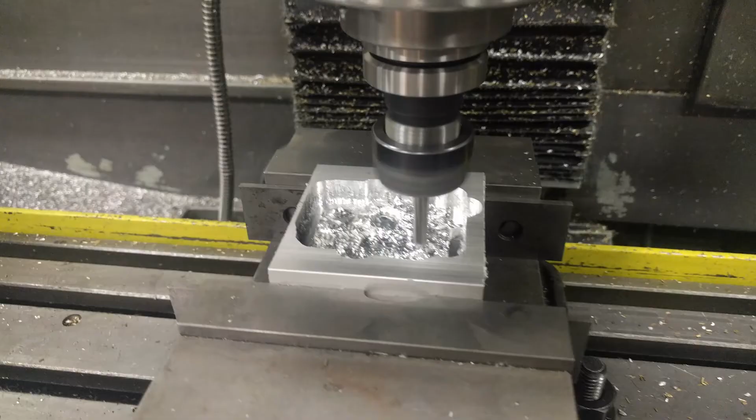A milling machine does have advantages over its 3D printer counterparts. For one, it's much more accurate. It's often made to a fraction of a millimeter accuracy. And on the other hand, you also are taking away things from a solid block of material, which means the end result has none of those layering issues. It's a single solid block of wood or plastic or metal, and it's going to be much harder to break things off. The downside is, of course, the geometry.

When you mill something, you have to be able to have a shape where the machine can take the milling bits and get into the places where it needs to remove material. That means if you have lots of long, narrow, shallow valleys, like say between buildings in a city map, you're going to have real problems with the milling machine having to get a tiny, long, thin bit through that narrow valley without breaking. It's possible, but you have to go slowly, and I mean very slowly.

The tiles I'm sitting in front of would take between 15 and 30 hours each to mill out of a solid piece of metal. That's a long time for a machine that I only have access to in 4-hour blocks. And so practicalities mean that even if a milled result would be much more beautiful, much stronger and harder wearing, I just don't have the equipment or the access to do that with this project right now.

Now, there is a third option, and it comes with a bit of a twist. Additive manufacturing, like 3D printing, can make very decent looking positives. But what you can do is take those positives and use molding and casting to make a mold of the original positive and then cast a new material into that to make a much more solid version.

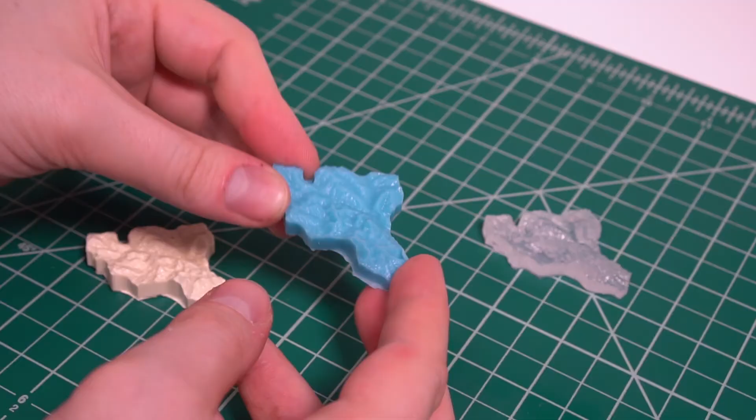In particular, cast materials, because they're casting all at one time rather than being built in layers like a 3D printer, end up being much more solid. And you have a wide range of materials to choose from. You can have clear resins or solid resins or even flexible rubber-based or silicone-based materials.

There is a problem though with casting and molding, and that is the mold making process itself. Molds are very tricky to design. Not only do you need to make a mold so that the resin or plastic can flow into every tiny detail and crevice, but also once it's done that and set, so you can get the mold out again. It can be very easy to make a mold that looks good initially, but you try and pour material into it and set it and it won't pull out properly, or you'll have bubbles all over it, or the tiny details won't be done properly.

And in particular, I've tried to make molds of some of these tiles. I've done some test runs with urethane and silicone molds, and the results aren't terrible, but getting the fine detail required for these models is difficult. I suspect with a vacuum chamber and a pressure chamber, I could probably achieve decent results. But again, this is still an introductory project kind of thing.

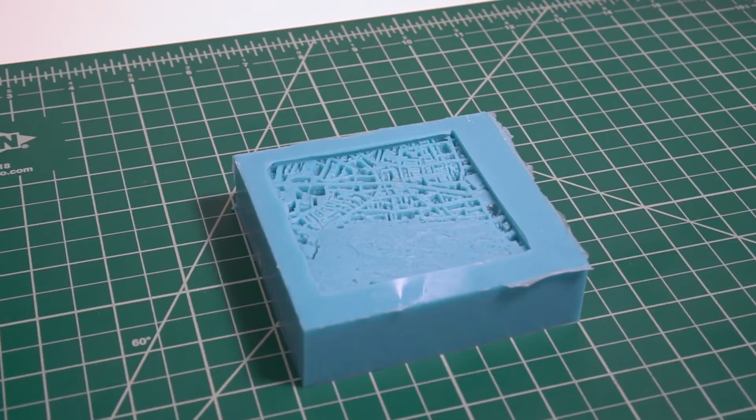But 3D printing in the end has proved the most reliable way for me to make these city tiles with the skills and tools I have access to. There are other projects I've done on the milling machines and casting, and I'll introduce those in later videos. But for now, let's go and look at the 3D printers and let me explain some of the problems and difficulties I've had and some of the ways I've tried to solve them.

So, let's talk about 3D printers and the different types they come in, and in particular, how they deposit materials and make up an object. Now, what I have here are both FDM printers. What that means is they take a big spool of plastic, like this one, and pass it through what's called a hot end to melt the plastic, like this one. Once it's gone through the hot end, the plastic's molten into layers and the object's built up layer by layer to make the final result.

There are other kinds of 3D printers that use things like lasers to fuse material or ultraviolet light to cure resins in place in a liquid bath, but FDM printers are generally the most easily accessible kind of printer and don't need much maintenance, so they're generally a good choice for someone working at home like I am.

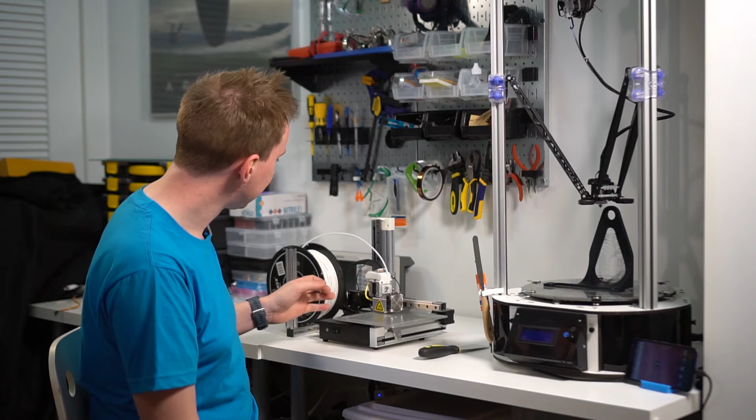Now, within FDM printers, there's a couple of different types of movement and that affects how they print. The most standard type is a Cartesian printer, and that's what I have here. A Cartesian printer moves its print head through X, Y, and Z axes that are perpendicular to each other. It's pretty simple. It's pretty much the first thing you might think of when you think of the challenge, how do I move a print head through 3D space? And that means it's easy to understand and easy to program for.

The second and slightly weirder kind of printer is a delta printer, which is what one of these is. A delta printer still has three axes, X, Y, and Z, but those axes actually stand up parallel to each other. And the combination of movements of these axes with these lever arms mean the printhead moves around in 3D space based on the way the different axes move. Now, you might wonder why you'd have a delta printer when a Cartesian seems much easier and simpler to program for. And the key thing is there's a trade-off.

The delta printer can move a lot faster. The way the delta arms are arranged means that the effector here can move around much more quickly and accurately compared to a Cartesian printer, because you can use all three axes at once. The trade-off is, however, the movement calculations. Deltas have to perform incredibly complex calculations involving calculus and trigonometry to work out where exactly in space the head's going to be as they move the three belts on these different posts up and down. And that means that the accuracy is very difficult to get.

In particular, often delta printers, as you get further away from the center, get less and less accurate. And so you really have a trade-off between speed and accuracy for these two printers. Now, in my case, the Rostock here, which is the Delta printer, was the first 3D printer I owned, and the 3D printer I did my London model on.

The London model, as you may have noticed, is made out of small 7.5 centimetre tiles, and that means they stay pretty much within the safe area on the printer, and they kept pretty accurate. Even then, the tiles are very slightly rhomboid. There's a lot of different parameters to tweak on a printer like this to make it perfectly accurate, and even a few tenths of a degree out on the angle of the different towers relative to each other can cause differences like that. And so it worked all right, but the tiles still have a slight visible edge to them when they're tiled together.

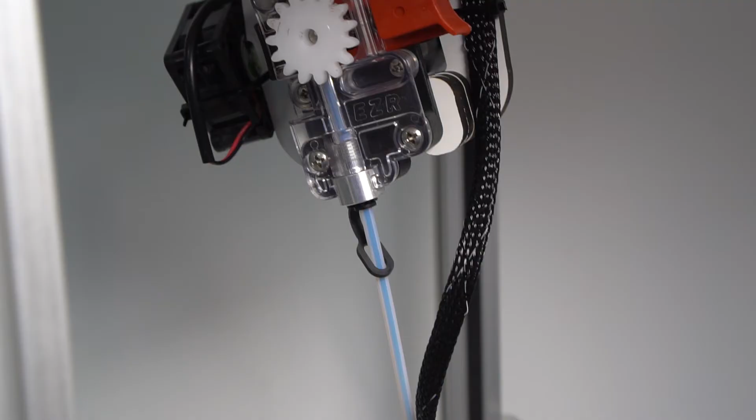When you're doing travels between different parts of an object, you'd usually try and retract the plastic up, try and suck it out of the printhead and stop it oozing. In a direct drive, this is pretty successful. The drive is so close, it just sucks plastic up and it stays in the right place. In a Bowden, however, you've got 40 or so centimeters here of plastic in this tube. And so whenever you try and retract, you're going to find yourself dealing with the elasticity of the plastic as you try and put it up through that tube. What this means is retraction is much, much harder to get perfect on a Bowden-style extruder like this.

Now, faced with this problem, I of course did one thing, and that one thing was buy a new 3D printer. This, the Cetus 3D. The Cetus is a low-cost printer. It's only $300, and it's a little bit bare bones, but it has these lovely linear bearings for each of the axes and has very good reviews about how well it performs. And so I made the plunge and got one.

And I've been very impressed. I got the Cetus, plugged it in, turned it on, sent it one of my files to print and slice, and it just printed it. The result is, as far as I can tell, pretty much perfectly square. There's no stringing at all. The details and the towers look really lovely.

And so the Cetus has become the workhorse for this project. The combination of our Cartesian style of movement combined with the direct drive extruder means it has that square accuracy and the lack of oozing that I'm looking for. There are some drawbacks. I have three main kinds of plastic I 3D print with: PLA, ABS and nylon in increasing order of durability, and the Cetus can only really do PLA.

The lack of a heated bed means that it's very hard to make ABS print well on this machine. The Rostock has a nice heated bed, you can make an enclosure around this and do ABS and nylon very well, but this is just PLA. That said, I like using PLA. It's easy to use, it melts very effectively, and doesn't emit any sort of toxic particulates while it's printing, and so that's what I've chosen to make my 3D models out of.

First off, let's look at Matter Control. Matter Control is the software recommended by the manufacturers of the Rostock, SeeMeCNC, and the one I use for most of my prints on that machine. It's got a reasonably simple interface. Over here on the left is a queue of objects to print. I've picked a small egg cup here as the demonstration model because loading the city tiles into this program makes it slow down a lot, and trying to record and show you this stuff would be problematic.

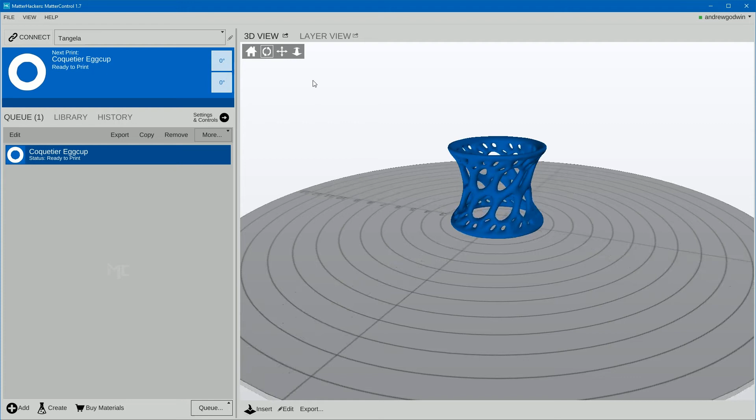So we've got the egg cup, and then we've got two views, this 3D view here, and then the second one, the layer view. The layer view shows you the actual tool path the printhead will take and the layers it's going to make for the model. You can see here the very base of the egg cup is just a couple of layers onto the print bed, but as you go further up, more and more detail starts to emerge and the different layers appear.

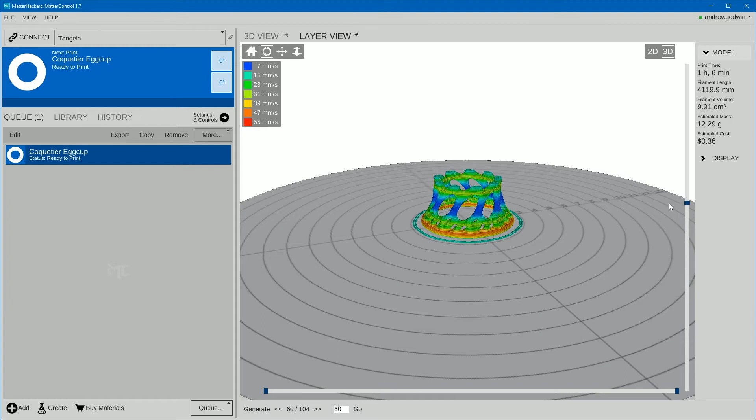The colours are the speed of the printhead. As the printhead has smaller and smaller pieces, it has to slow down to make sure the plastic has time to cool before the next layer. Otherwise, it will just go back over hot melted plastic and just ruin the previous layer. But you can see here the final egg cup and all the layers that would go into making it.

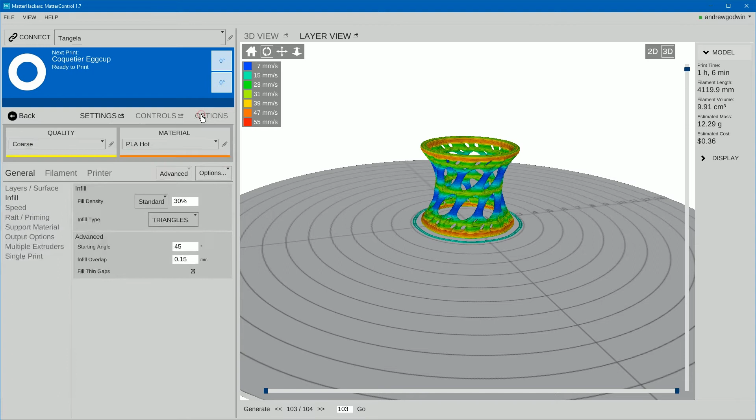Now, of course, you don't just put things into the program straight away. There are options of how you slice it. And the main two options here are two presets. The quality, which generally determines the speed and layer size, and the material, which determines the temperatures the printhead uses to melt the plastic. Here I have coarse and PLA hot selected.

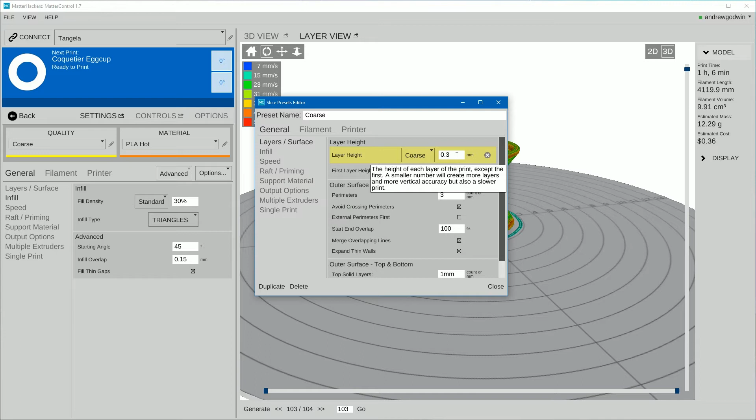The coarse setting sets the layer height to 0.3 millimeters. That makes the layers fatter. So you do fewer layers, but you'll see more obvious ridges on the part because the layers are much more visible. It also turns the speed up above the recommended basic limits for the printer. The delta can go pretty fast, but it will start to lose a little bit of accuracy the faster you go. The PLA hot setting is just PLA settings turned up a little bit in terms of temperature.

You can see here in the filaments, the extruder temperature is 190 and the bed temperature is 60. There's options here for other things such as PLA, ABS, and even flexible rubber-like filaments like NinjaFlex. There's also other options to how it's sliced.

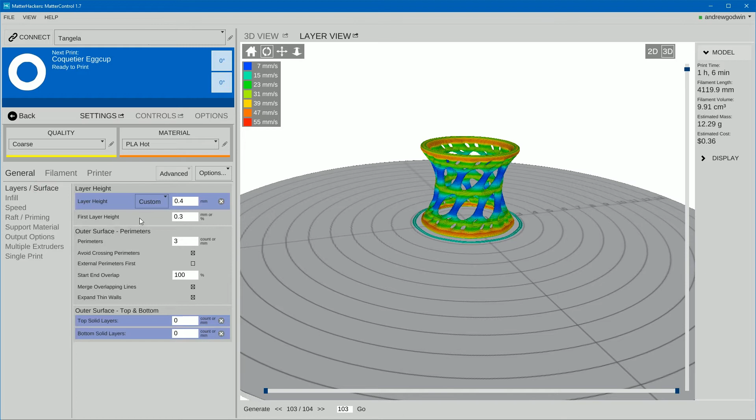We can see here lots of things about, for example, how high the layers should be, how many perimeters we should do. If we look at the two-dimensional view and go to the middle of the egg cup, you can see that there's only 2 or 3 perimeters used anyway. And so it's not going to make much of a difference. We could, if we wanted to, turn this down to 2 or 1 perimeters. Let's put 1 in here and regenerate.

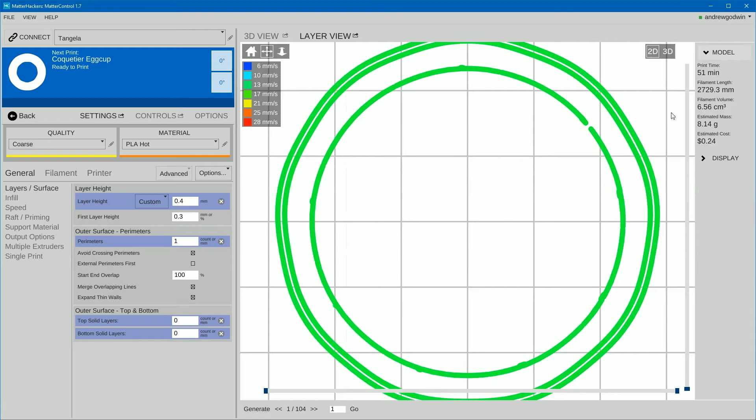Now, we've regenerated with only 1 perimeter, and going through the model, you can see that the inside is much more hollow. There is a little bit of infill, but that is in the empty area. There's some lines and cross-hatching here, which is controlled by our infill setting. We can change the pattern of that kind of stuff as well. But generally, it's a case of going through here and finding out what works exactly for you.

The city tiles in particular require a lot of attention to things like the retraction settings. Here in MatterControl, those are under filament. And you can see here a couple of options around how those are changed. The most important setting here is the length of retraction. This is how much the extruder motor is going to pull that plastic back out of the printhead while it tries to move the printhead through space.

Now, here it's set to 4. This is quite high, but about right for the Rostock. But for a smaller printer like the direct drive on the Cetus, probably more like 1 or 2 millimeters at most. My recommendation for the Rostock is about what you see here. No Z lift, a decent amount of retraction, and going at quite a decent speed.

There's many other options in here to play with as well. Things like the temperatures, the way the fans go for cooling. PLA requires cooling as it's printed to make sure the previous layer is set in time for the next layer. And plenty of other things about how the supports work or having a raft to keep it on the bed. But these are topics much better covered by other people. This is just a general idea of what you end up with when you take a 3D model, like this egg cup, and pass it through a slicer like this to get the resulting toolpaths.

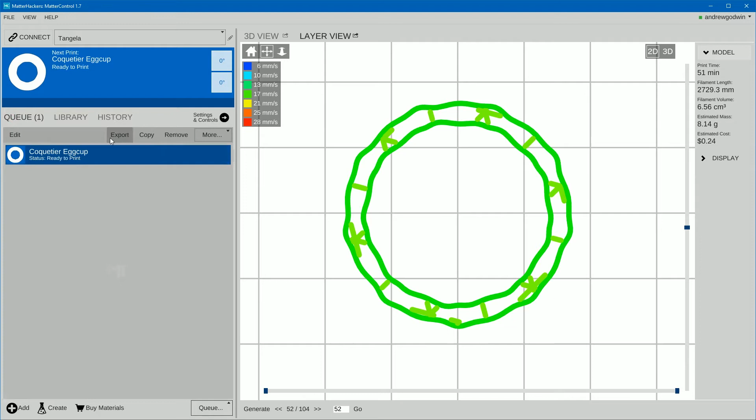The final step is to take these toolpaths and export them as G-code. What we can do here is just select the model, hit export as G-code. And then we can just save these into the right place, and we have a G-code file we can send to the printer. In the case of the Rostock, the printer takes either an SD card with G-code on it, or you can connect something like a Raspberry Pi running OctoPrint to it and send files to that over web interface. Let's go over to the Cetus interface now and see how that looks.

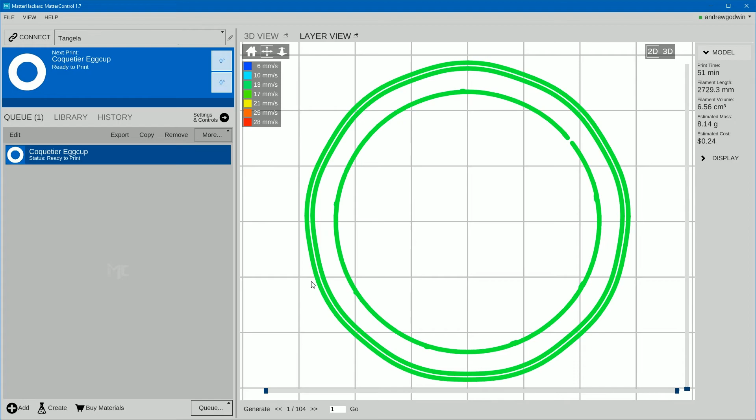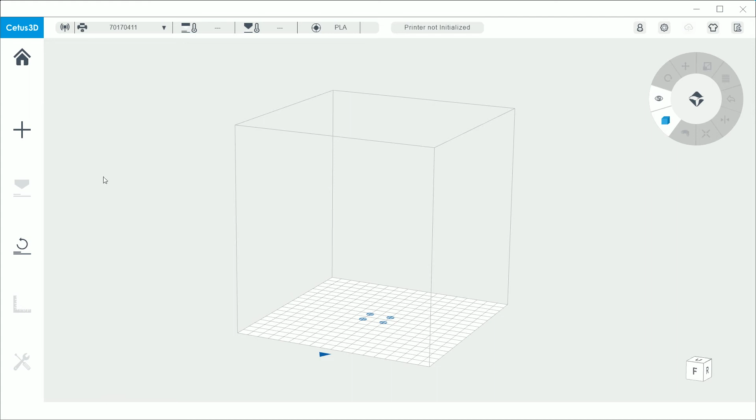So here you can see the Cetus interface. It's an all-in-one program that does printer communication and slicing in one go, but handily it can talk to them over Wi-Fi. So we can go in here, select my printer, and connect to it over Wi-Fi. Once we've done that, we can go to the print screen and do a couple of things. First of all, we can add one of the models to the print area. The box on the screen here shows the entire build volume of the Cetus, that is where it can print. And so if we go in here and just pick one of these models, these are the London tiles in this case, it will load up the model and we can see it here rendered on screen.

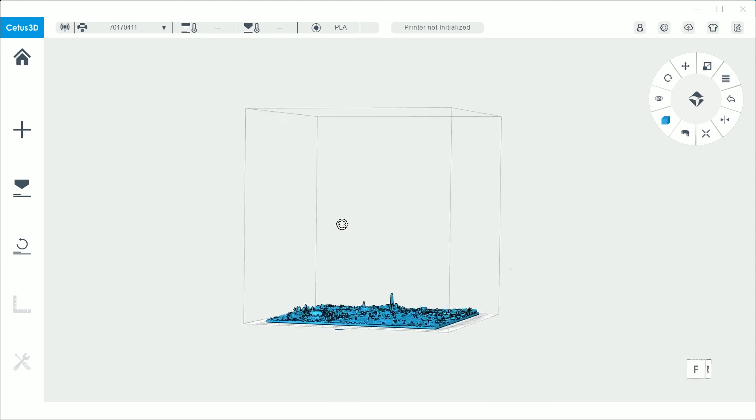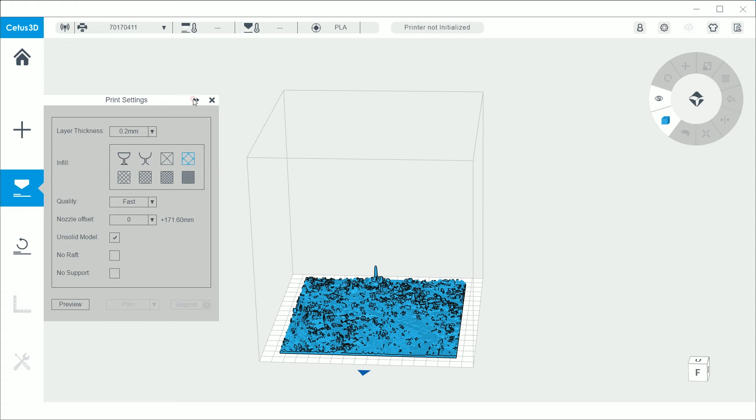Now, notably, the Cetus software is remarkably good at slicing large, complex things like this very quickly. On things like MatterControl or Slic3r, this will take a good 10 minutes to slice properly. Whereas here on the Cetus, we can just hit the print button, choose some of our options. We have, again, layer thickness and the infill patterns and how you want to infill, as well as some more advanced options over here. But you can just pick these options, hit preview in this case, and it will slice in less than a minute, which is a very impressive performance for something this complicated. These models generally have on the order of 30 to 100,000 polygons in them, so it often chokes up some software.

So here you can see it's finished slicing. It's giving me an estimate of both the print time and the amount of material it will take to print. You can also see here that it's made a raft underneath the object.

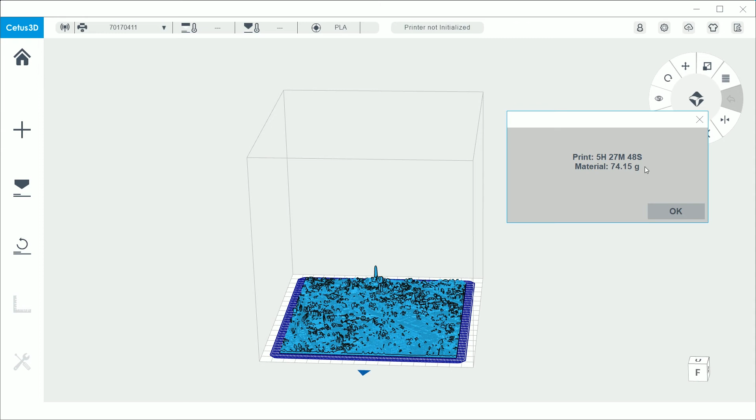This is one small thing about the Cetus. It likes making a raft to keep the print adhered to the print bed. It does waste a bit of plastic. On something this big, it's a good 30 grams of plastic just to make the raft. But I have seen very good results with the raft, keeping the bottom of the tile lovely and clean and making sure it peels off really nicely.

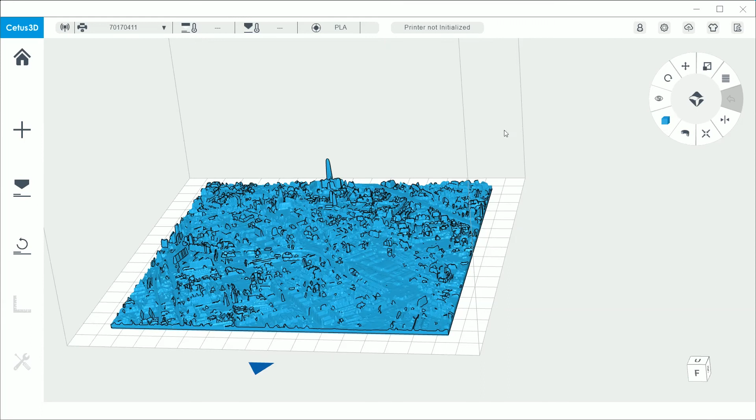Now, unfortunately, I haven't found an easy way to view the layers in the Cetus software, but that's not a problem. It generally does a pretty good job of slicing it anyway. So once you've got the model loaded in, you're happy with the way it looks and the arrangement on the print bed, you just hit this button here to initialize the printer and home it on all 3 axes. And once that's done, you can just hit print, make sure your options are still good, and send it over to the printer to be printed.

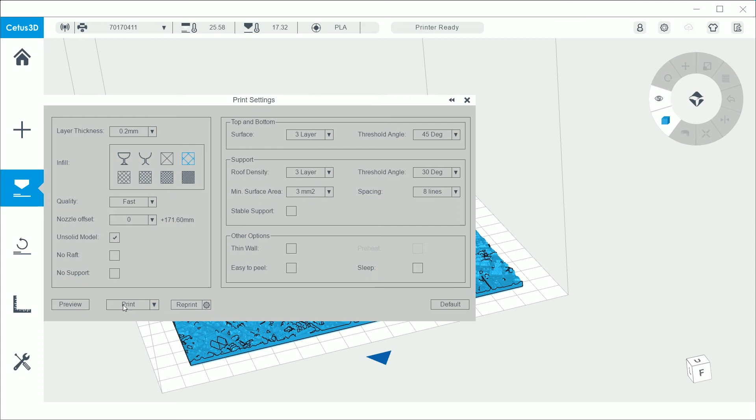The Cetus runs everything by itself, so once it's sent over, you can just close the software and let it run entirely disconnected from a computer, and it will happily print away until it's completed. This is especially useful for these big city tiles where they might take 10 hours to print. I want to make sure they print overnight without leaving a computer on or plugging in a Raspberry Pi to act as the brains of the operation.

So that's the basics of slicing. Once you've got the STLs like you saw in the last piece, it's really not too hard to put them into the software of choice and make them come through. You might have to fiddle with some options to make sure they print perfectly, things like the infill patterns or retraction, but I recommend printing small test pieces, say a 1/8 size piece of tiles like this, and making sure they turn out well before you start on the big tiles and the long, multiple hour prints.

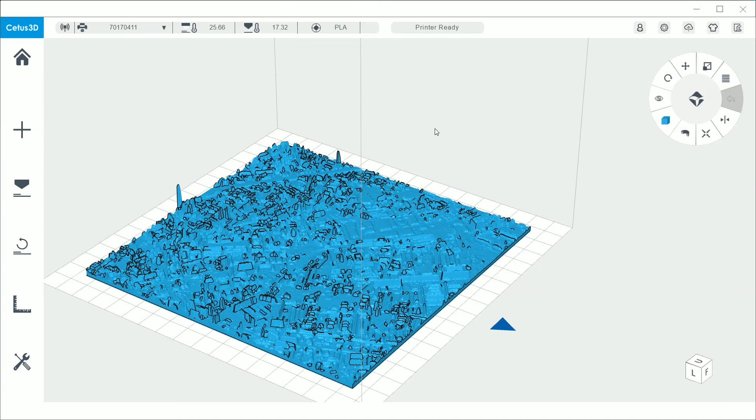Well, that covers slicing the STL files into G-code and sending them to the printer. Now, there's one thing left to do, and that's assemble them into one big piece of art. So let's go back to the table and start on that process. The final part of the process is to take the printed tiles, finish them off, and then mount them onto a backing board. Finishing them is pretty simple.

I just need to make sure that the edges of the tiles are perfectly smooth so that when they join together, the edge between them is almost invisible. For this, I just use a piece of sandpaper like this, glued to a nice flat block of wood to sand it down. PLA is very easily sandable. Once that's done, I need to mount them onto a backing board.

Now, there's a couple of options of what to mount to, plastic or wood. I've gone in this case with foam core. Foam core is light and inexpensive and easy to cut with scissors or knives, and so it's a good choice for this kind of project. What I'll be using to mount to the backing board is hot glue.

Hot glue is also nice because you get a little bit of working time as the glue sets to really get the tiles in just the right place and make sure they're perfectly flush with each other. And if I screw it up, I always have the choice of ripping them off the backing board. The glue is not that sticky. It'll probably destroy the foam core, but it's cheap enough I can get a new piece. So let's get to it.

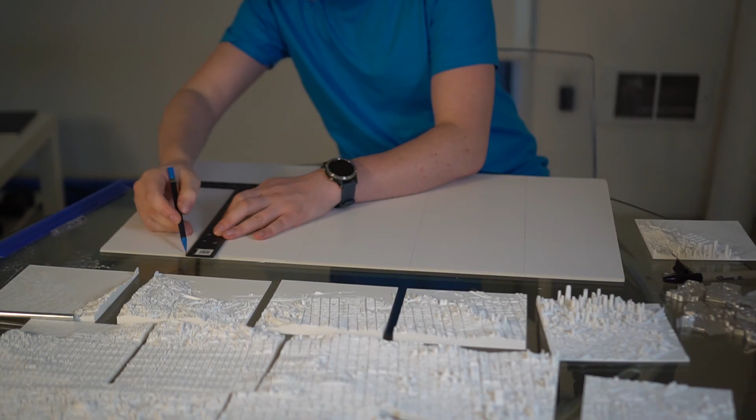Well, that was a bit trickier than I expected to glue them all down precisely, but it's done. And I've got to say it looks really quite nice. The hills and the buildings stand out really well, and some of the problems I had in the London model, like very visible seaming between tiles, are almost entirely gone here. There's a small seam, but it's quite hard to see, and at any sort of angle it vanishes entirely.

There's a couple of things left to do, the main one being to glue some wood along the back here to act as a place to hang it up, but I'll do that later. And with that, we've reached the end of the build.